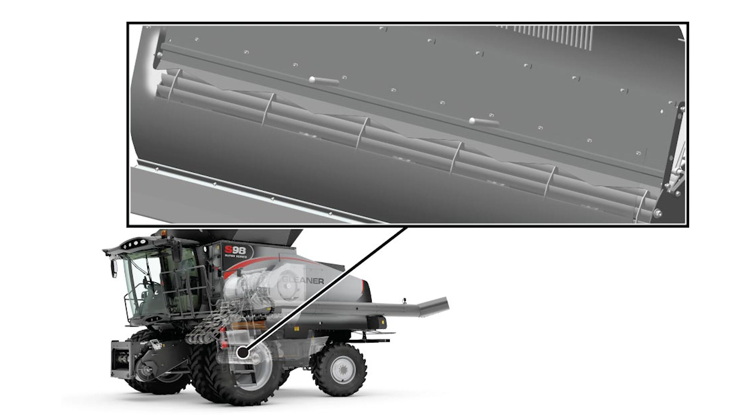First off, we'll talk about the cleaning fan cutoff area. We've made an update there to eliminate excessive noise in the operator's cab. So the front edge has been changed to eliminate a blade pass frequency that was causing a high-pitched noise in some machines, but not all.

The next item is the clean grain elevator. So we made improvements there as well. The chute and the funnel located on the return elevator head cover have been updated to prevent grain leaks. The funnel has been lengthened and the chute has been fully enclosed. Additional sealing has been placed both at the funnel and at the clean grain elevator head door. This will impact those small grains such as canola, which can always find places to run out even the smallest little cracks.

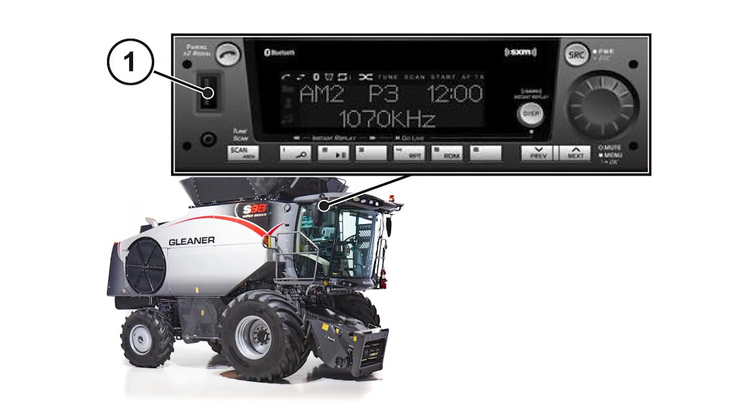Also, we've made some new improvements and added a new radio option. Both of these options have been updated to the latest display, which gives you the ability to charge iPads or whatever through the USB port and remove some of that old technology such as CD players. Both guidance receiver options have been updated also to the latest models. The Novatel receiver now is the Smart 7, and the Trimble guidance receiver is now the AG482. RTK is also available on your Gleaner combines as well right now.

So those are pretty much the model year 22 updates and improvements. There's more improvements being worked on currently with our engineering team right here in Hesston. So let's talk about kits. We have a few kits that will add the performance to your Gleaner combine.

The slow speed elevator kit. This is to slow down the clean grain elevator when you're harvesting lower yielding crops. Speed obviously causes more wear on the chains and sprockets, along with less grain damage by being able to slow this down. Over the years, we've increased the performance of our elevators for these high yielding crops, and we've sped things up, but it's not needed for all crops.

The next kit I would like to talk about is our chaffer extensions. These are additional hillside performance kits that you can put on to help keep that grain in its lane while you're harvesting on those slopes.

The Cascade Pan Blank kit is for those small grain applications. We added a perforated cascade pan for high yielding crops, which increased our shoe capacity. But for small grain, you may not need that, and this blank will actually help you clean up your bin sample in some conditions.

The perforated elevator boots have been around a long time. This helps remove dirt out of the grain while harvesting close to the ground - lentils, peas, beans, those types of crops.

And then we have a light seed kit. This is so when you're harvesting grass seeds where low volume air is needed to keep that seed in the combine and not be blowing it out.

And then the last kit, don't forget that we have a hitch extension if you would like to pull your header trailers around behind your combine. Those are some of the kits available for your Gleaner combine. If you have questions on these kits, our product specialist can be a great resource for your needs.

So let's talk about some of the activities we've been doing lately. We consistently hear from our customers about the low fuel usage, great grain quality, and low cost of ownership of their Gleaner combines. So our team decided we needed to start collecting some additional information from our customers to really understand the impact of all these items in a complete season.

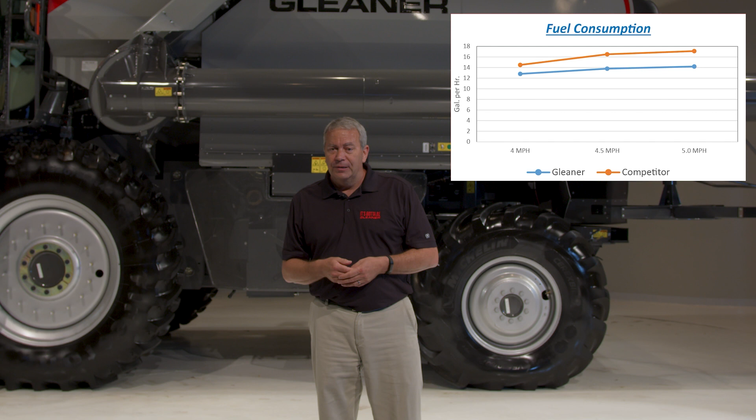This is just one area where the Gleaner outperforms the competition. As we talk to growers, we always discuss things like commodity prices, which are fun to talk about right now, but weren't a year ago. The weather, it's wet, it's dry, high input cost - all things that are impossible for you, the customer, to control, but affect your operation in a big way.

Sometimes we overlook what we can control - things like matching the correct size combine to our operation to make it the most productive. Bigger isn't always the answer to completing harvest faster or the most profitable way. Getting into the field quicker when dealing with wet conditions to get the crop out sooner, spending less money per acre to complete your harvest. These are things that you can control.

So over the years, we at Gleaner have always talked about some key items that set our machine apart from the competition. You've heard us talk about simplicity, lightweight, grain quality, fuel efficiency.

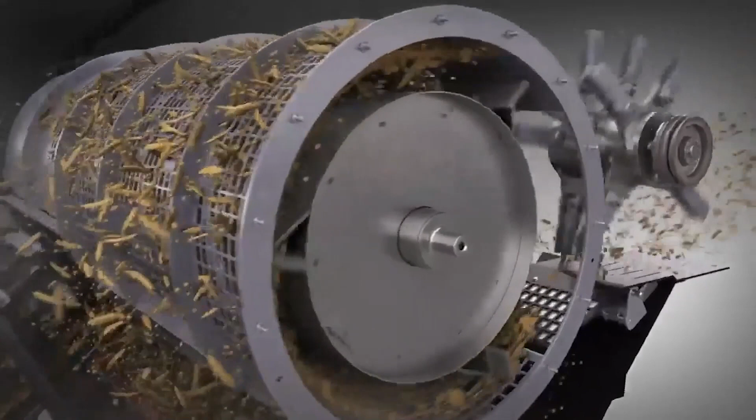So grain quality. The natural flow design keeps the crop flowing evenly without changing the direction, controlling the flow of material from the time it enters the feeder house until it discharges out the back of the combine. 360 degrees of separation. The natural flow system is gentle on the crop, and the two-stage cleaning system will deliver a quality bin sample.

But what does that mean? No dockage at the elevator. And for some growers, it means being paid a premium for their crop without sacrificing capacity, all adding up, again, to increase margins for you, the grower.

And of course, fuel efficiency. All the items that we have discussed thus far have a huge impact on the fuel efficiency of a Gleaner combine. Tied with AGCO-powered engines, the machine consistently will harvest crops using less than a gallon per acre all day, every day. And that equals less cost of operation.

So as discussed, some things are out of our control, and some things we can control. There are just a few that we can control, and the Gleaner delivers a low cost of operation, low cost of ownership by design. No, this combine is not a 6,000 bushel an hour machine, but we do know on the average farm it will harvest 3,500 to 4,000 bushel an hour for the entire season, not just for an hour, and do it with less cost than our competitors.

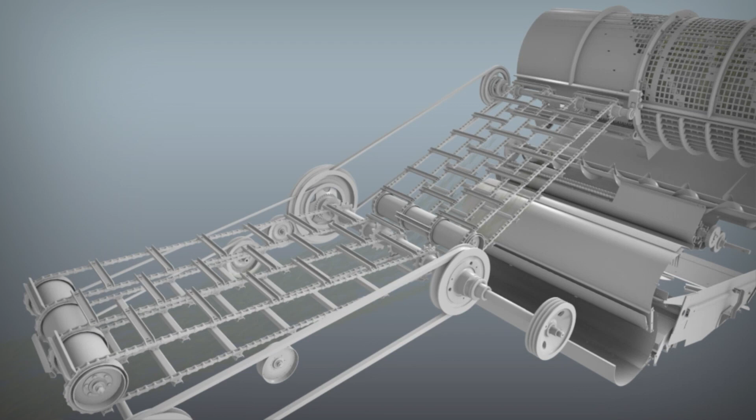Now the Gleaner combine uses two feeders, a front and rear feeder. The rear feed chain runs 10% faster than the front. This is to help avoid any issues between the transition between the two feed chains. The feeder house was updated for S9 machines. First off, the area below the feeder chain that's introducing the crop into the processor was increased. This helps in heavy crop conditions and canola. In addition, the feeder house was lengthened, and that's to help with the visibility of the header.

Let's talk about some of the things I hear at the farm shows all the time, and that's the width of this feeder house. At 39 inches, people are saying, how in the world can you get so much crop through there?

Well, it's the design of the Gleaner that makes this possible. We start at 39 inches at the front, which also happens to be the width of our concave where it enters the processor. Once the crop enters the front of the combine, we're controlling that mat of material across the concaves through the natural flow process and out the back, always keeping the flow of material at an even pace and the same width the whole distance.

Where the competition has wider feeder houses, at some point there's a transition point where we have to get it into the processor, and that gives you an opportunity for feeding issues, changing direction of the crop, maybe crop damage, and a lot of different things. This is what really sets the natural flow system of the Gleaner Combine apart - how we handle the crop from start to finish.

The header drive is available in two different configurations: the standard fixed speed header drive or the optional variable speed header drive. A hose located at the single point connection is switched when you're installing a corn head.

Both header drive options include a 2-speed feeder drive that must be switched when switching between crops. You'll want to have it in high speed for small grains and low speed for corn.

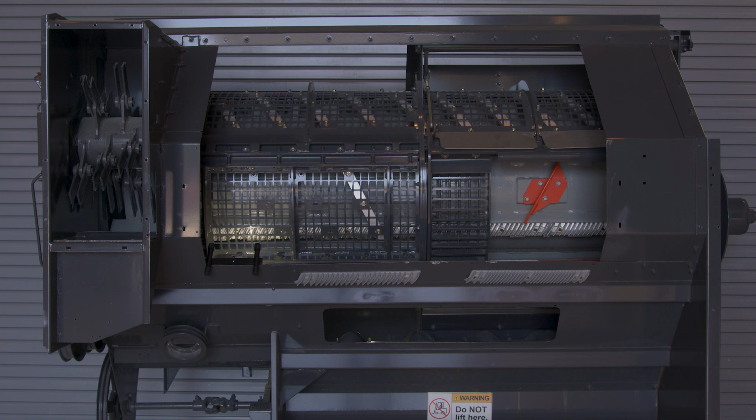Okay, thanks Aaron. We've talked about the feeder house, now let's talk about the processor a little bit. I mentioned the 39-inch feeder house on the Gleaner, and now here's our concave area that is also 39 inches. So as that crop comes into the processor, it goes across the concaves.

Then we start that 360 separation as that crop material moves through the processor. We have helical bars in here to help the flow of material, keeping everything moving across the processor, and then out the discharge over here.

A lot of people talk about the width of this discharge too - how do you get a 40-foot head and all that material coming out this discharge? Well, it's the way we feed the material out of the processor that makes the difference. Think about just taking a slice at a time off of that rotor as it's spinning the crop out, versus the competition where you've got everything coming out the back of the rotor. That's how we're able to get that much material through this discharge portion.

Aaron, maybe step over here and walk us through a few more details of the processor. So the 30-inch rotor was introduced in 2011 with the S7 series of combines, and we still use that same rotor in the S9s today. That rotor consists of 6 rows of threshing elements equally spaced around the rotor.

Each one of those consists of long and short threshing elements. The 3-bolt variety are in the threshing section, and the 4-bolt variety are in the separator section. The standard configuration is 3/4 inch spacing on all of the threshing element ribs, equally spaced all the way around, and amongst those we have some with a reverse pattern to increase the amount of scrub as material moves through the processor, increasing threshing action.

So Aaron, I see we've got a narrow bar here - what's this bar actually used for? So this bar is our 1/2 inch spacing. This is for guys that have tough threshing conditions - if you've got a lot of white caps or just conditions that need a little extra threshing. The other person that's going to use that is the guy that has a stripper head installed - they're going to want to use these in addition to possibly some close-ups that install on the bottom side of the concave.

Now speaking of our concave, we can talk a little about it. Our concaves consist of 4 sections, kind of removable sections in a pivoting frame here. The really positive thing about this is that we have one concave for all different crop varieties - you don't have to worry about switching concaves when switching between crops or different conditions.

So what you're telling me is, like a lot of our competitors who are having to switch concaves, here we just go crop to crop. Absolutely, you can use the same concave for all different crop types - just imagine the amount of time you'll save not having to switch these concaves out. We talked earlier about the efficiency of the Gleaner Combine and how we can get so much done, and this is just another time saving to make us more efficient. Absolutely.

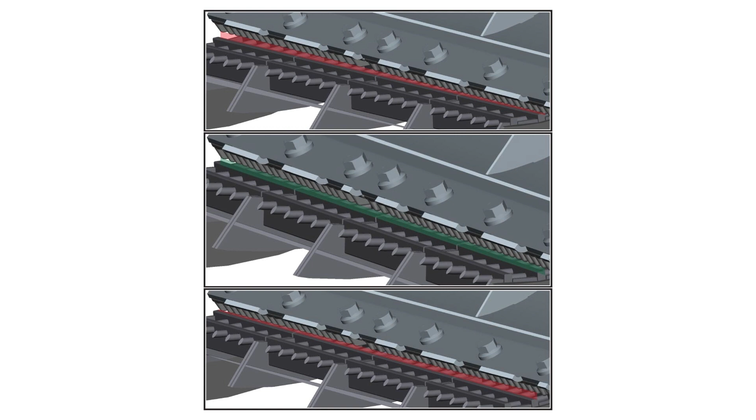When I'm talking about leveling, I'm making sure that on the left-hand side and the right-hand side we have the same amount of threshing across the whole of the concave section. Because if you're too tight on one side and too loose on the other, you could be over-threshing on one side and not threshing on the other.

So the way you do that is you want to make sure you have an eighth of an inch with this concave all the way closed. You want a minimum clearance of an eighth of an inch at the second concave crossbar here. We got them painted here just for clarity as well. That's another important thing we need to make sure of.

All right, so a lot of stuff going on in the processor right now. So what else can you tell me about this? What else is going to happen here? Another thing that's important, another addition we've made to our rotor, is the addition of these flights here.

One of the things we talked about earlier with our threshing elements is that they're doing two things: threshing the crop and also conveying that material through the processor. When we increased the size of the threshing element, we saw there was a chance that when we're feeding that crop mat in, it's going to lay over on top of itself.

These flights that we've installed on the rotor help answer that issue. There are two reasons: when crop feeds on top of itself, it increases the thickness of that crop mat, which means more horsepower is needed to drive it through. The other issue is that it traps seeds in that crop mat, which could cause increased rotor loss. So what these flights do is move that crop mat over just slightly to help keep it from laying over on top of itself.

Which is so important in the overall feeding of any combine, is to keep that material moving evenly so that you can thresh it and clean it. The whole system just works so much better.

The other item here, as you talked about the sweeps, but the cylinder bars are an important part of that conveyance as well. So it's always important to keep your cylinder bars in really good shape, because that can hinder performance, not only threshing, but also keeping the material moving through the combine.

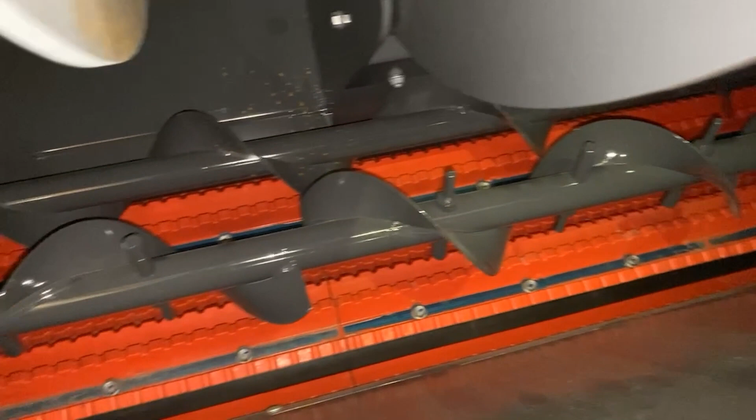So I see augers and... We've got two distribution augers with opposed flighting that bring the material from the separator section over and from the threshing section as well.

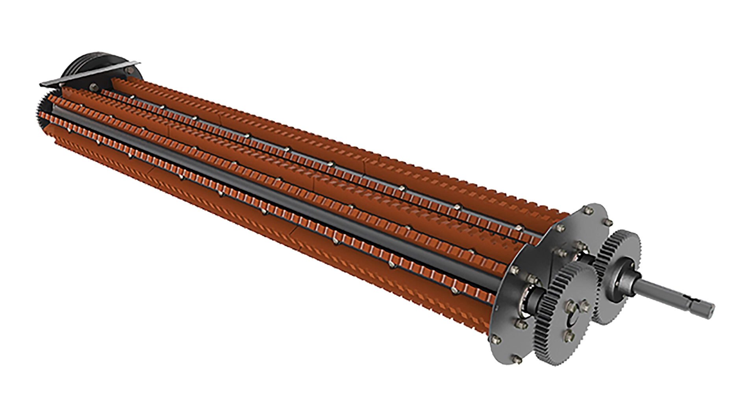So with all this going on, we talk about our two-stage cleaning in the Gleaner Combine that I mentioned earlier. This is how we achieve that, by pushing that crop down, getting that blast of air as it comes off the accelerator rolls, and also gives us some really good hillside performance as well.

Absolutely. The guys that really work the machine, like in Idaho where they're harvesting on the sides of hills, we don't rely on gravity to propel that grain through to the shoe. That's why guys on the sides of hills in Idaho, or anywhere with any kind of incline, don't have the need or want for any kind of expensive or complicated leveling system, because we use our accelerator rolls to evenly load that shoe.

So when you look at the overall design of this processor, the cleaning system, the transverse design, which is one of a kind, it's set up to not only be a great processor but also a cleaning system all in one, just like if you were cleaning your seeds through a regular cleaning process. That's what this machine is doing while it's working through the field.

So anything else you can tell us about it, Aaron? No, I think we're good. Let's move on to the cleaning system, to the cleaning fan, and talk a little bit more about it.

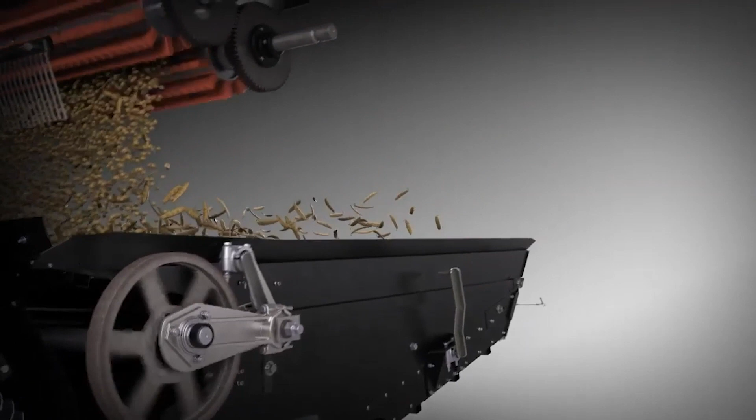Now the cleaning fan here is a 14-inch scroll-type cleaning fan that develops two streams of air. The first stream is where a majority of that cleaning action happens. The accelerator rolls throw that material through that first stream of air, and the more dense crop is able to pass through that first stream, while the less dense MOG is blown out the back of the machine.

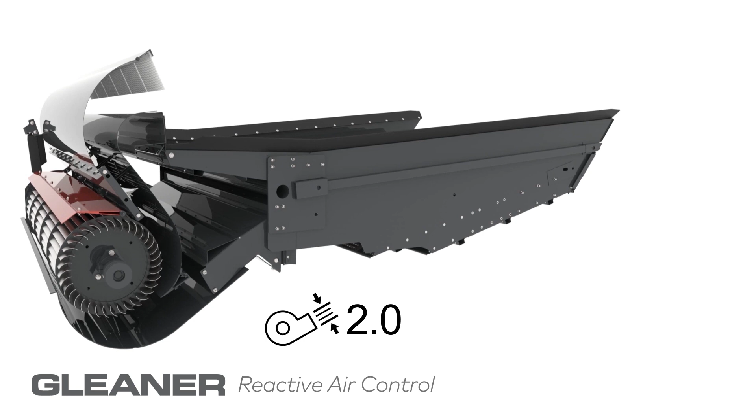So what changes have we made to this system recently? We introduced the reactive air control system, where we control the amount of air coming out of the fan by adjusting the choke based on the position of the feeder house. As the feeder house comes up above the cutoff line, we actually decrease the volume, decreasing the amount of airflow to save the seed coming across the shoe and decrease shoe loss.

This happens at each end of the headlands, saving that seed to keep it in the bin and not on the ground. So just another feature we offer on the Gleaner Combine that helps the bottom line by keeping all the grain in the tank.

So when you look at the whole system here, we've been through the processor, talked about the distribution augers, the accelerator rolls, the two-stage cleaning that I alluded to earlier to get those clean bin samples. These are the types of things that really set this machine apart, and that is the heart of the Gleaner Combine. The transverse rotor, distribution augers, accelerator rolls, two-stage cleaning is all part of that extra you get with the Gleaner Combine.

We've got a few other things to talk about. We've got the cleaning shoe too. So let's take a look at the back side of the machine and talk a little bit about it as well.

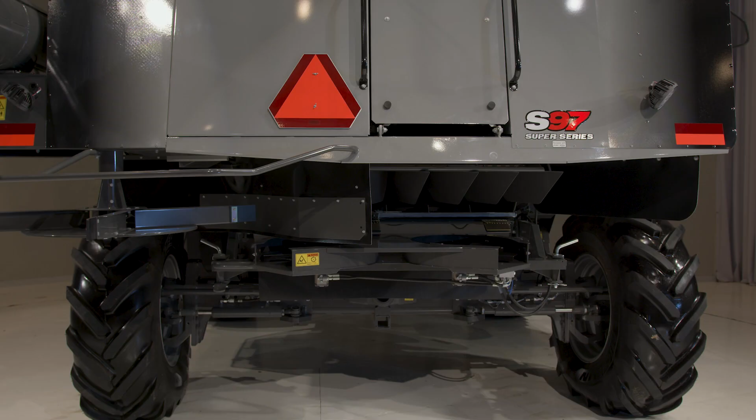So Aaron, I hear so much out there in the field about residue management and how important that is. We've talked about a lot of other important things this machine does. Tell me about the residue management system on the Gleaner.

Well, there's a couple things we can talk about. First off, at the end of the rotor, we alluded to it a little bit earlier about our chopper, but we actually have two different options. We have an impeller, which is standard on machines, and the optional 24-blade chopper, which is a two-speed chopper that you're able to adjust between different crops. You want it in high speed for small grain and low speed for corn.

So once that material comes off of that rotor, off of the chopper or the impeller, it comes down here to our straw spreader. Our straw spreader on the S9 machines utilizes a closed loop functionality to where we're maintaining that spreader speed throughout the day, whether the oil's hot or cold.

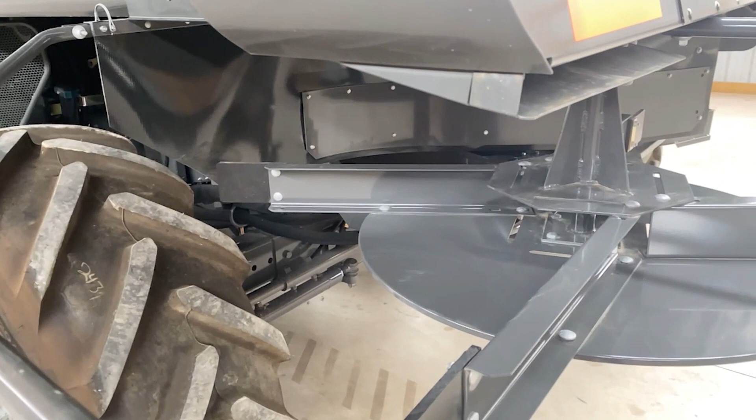Also, Aaron, I see there's some adjustments on these spreader blades. Exactly. What we adjust there is to be able to adjust our spreader width. So if we've got different sizes of headers, or if you need to direct it in one direction or the other, you can adjust the position of those slingers to adjust that spreader width.

So when you look at the residue management coming out of the Gleaner, you have everything off your discharge, which is being spread with the spreader over here, and then all of your chaff and other material coming off of our shoe comes right into our standard chaff spreader. All machines are equipped with a hydraulically driven chaff spreader.

The nice thing about it is it's easily swung out to be able to access our cleaning shoe and be able to service it or change out chaffers or sieves. So let's do that real quick.

Yeah, that's extremely easy, Aaron, and it gives you good access to get into the cleaning shoe itself. Absolutely. So on our chaffer and sieve, when that material comes through that first stream of air, it's deposited onto the cascade pan, which is a perforated cascade pan to increase the amount of cleaning surface area we have on the shoe.

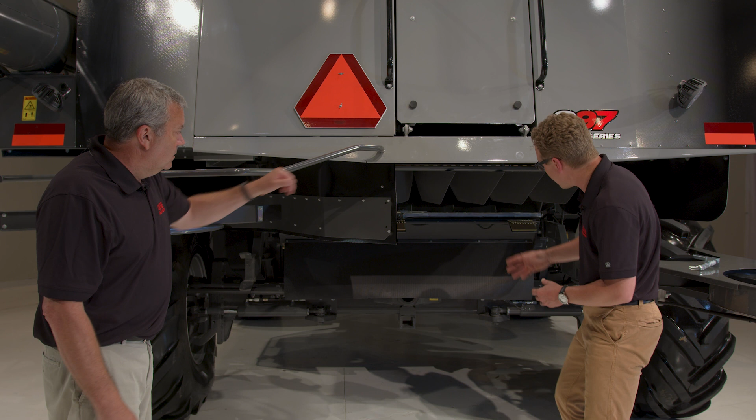Now, I think you alluded to it earlier. We have a kit available to be able to block that off in certain small grain conditions. Yes, absolutely. And in some conditions, that's maybe a kit that you would need. Right? Absolutely. As far as the chaffer and sieve, we have different options depending on crop condition or just the cleanliness, how they want to adjust that cleaning shoe to get the maximum cleanliness out of their bin sample.

So just noticing these fins in there, Aaron. That's our spreader board, distributing the material that, remember, we were talking about earlier, that's coming through that first stream of air, across the width of the back of the machine to maximize discharge spread and get that nice even mat for those guys looking for no-till or just decomposition of that material.

So there's a lot of air coming out of there. A ton of air coming out. Majority of our cleaning's happening through that first stream of air. Right, and that's all part of the cleaning system on the Gleaner Combine.

Absolutely. So let's talk a little bit more about our unloading auger system and our grain tank. So Aaron, we've talked about feeding, the processor, the cleaning system, residue management on this Gleaner Combine, but what about the grain handling system?

Well, we've got one of the best in the industry. It's one of the fastest and most efficient, as well as one of the best as far as keeping that clean grain bin sample. With a 4 bushel per second unloading auger rate, we're able to go from full to empty in about 90 seconds. To do that, we incorporate this swivel design here that, unlike our competitive machines, doesn't use a lot of power to go through that turret unloading auger that they have. We're able to easily transition that material out to the grain cart.

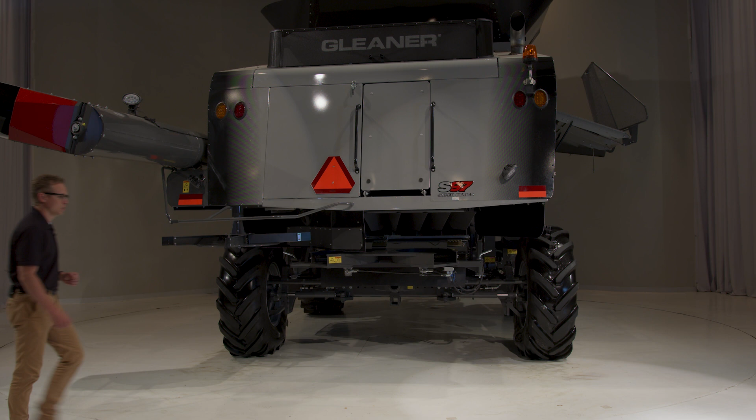Daily inspections start in the engine compartment. Make a general inspection for any material buildup or leaks around the engine. You also want to inspect around the heat shields to make sure there isn't any material buildup around the heat shields of the engine.

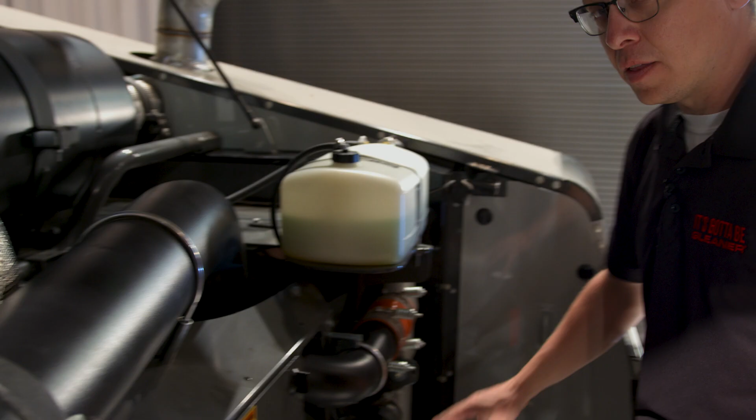The hydraulic reservoir for the hydraulic system is located in the engine compartment. It's important to check the level with the feeder house down and the unloading auger swung in. If you check it with the feeder house up, or the unloading auger swung out, you're going to see that it reads low, and if you overfill it and then drop the feeder house or swing the unloading auger in, you're going to have quite the mess in the engine compartment.

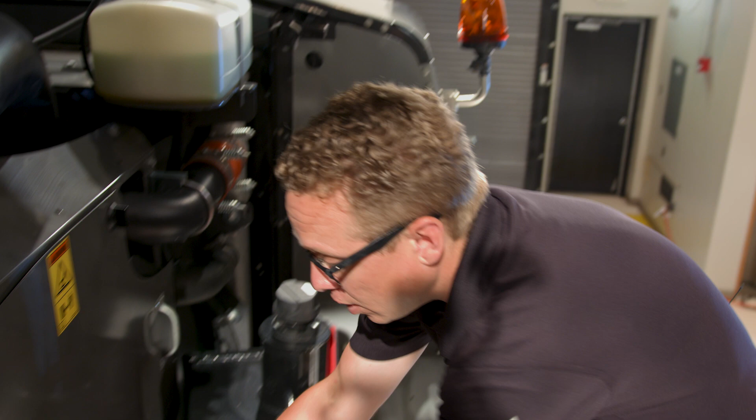Also located inside the engine compartment is the hydraulic charge filter. This needs to be changed every 250 hours.

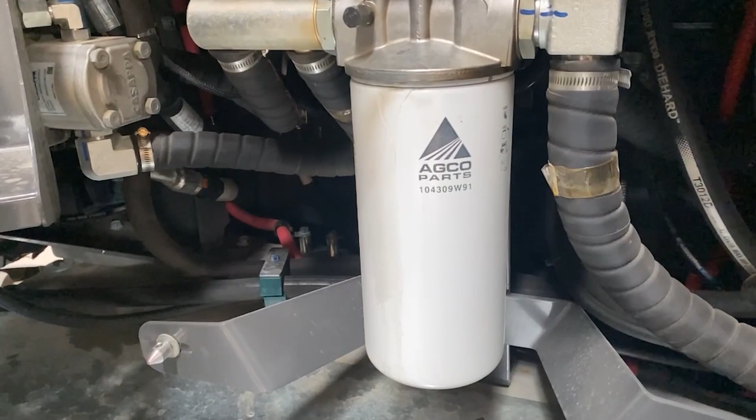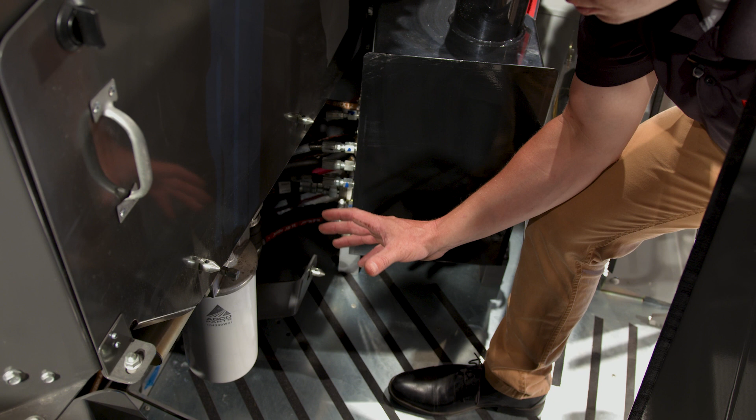Any time you change the hydraulic charge filter, you need to make sure you bleed the air from the system. There's a little bleeder valve right here. So when you change this, you'll want to fill the reservoir until you get just hydraulic oil out of this bleeder screw. If you have a pocket of air trapped inside and start the combine, there's a really good chance you're going to cavitate the spreader pump and destroy it. So make sure anytime you change this charge filter, you're bleeding the air from the system. You'll also want to change the charge filter, the hydraulic oil, and our return filter every 500 hours.

While you're in the engine compartment, it's a good idea to open up the processor door and inspect our rotor and separator cage for any kind of material buildup or condition of our rotor components.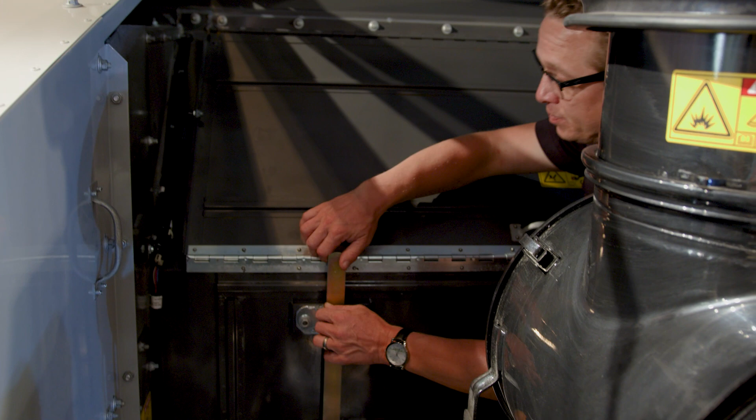You want to inspect for any kind of material buildup between the separator cage and the separator door. You'll notice there's a panel installed that helps prevent that from occurring. Sometimes rotor speed can cause that accumulation to build up as well, so before you remove this panel, try adjusting your rotor speed, dropping it a little bit, to see if that corrects the accumulation.

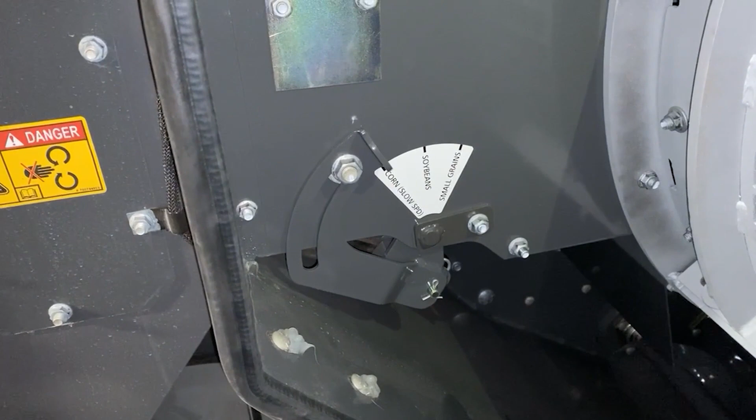You can also see inside here we can access our chopper knives. So if you need to move these stationary chopper knives, depending on the crop you've got, you can do that from inside here.

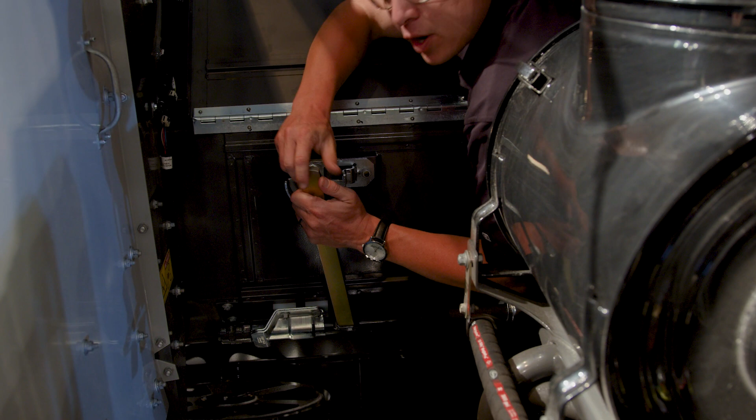Make sure that when you're closing this processor door, these latches are securely latched. If they're not securely latched and this door is not fully closed, you can fill the engine compartment with material really quick. So make sure you put a hand on these and confirm they're fully latched.

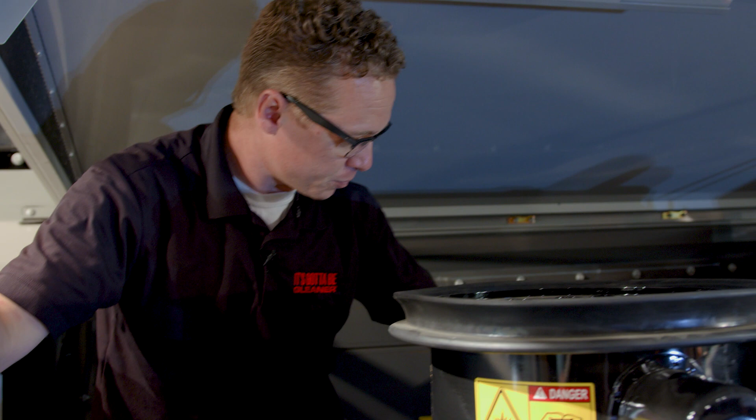Now the front of our engine is easily accessible from the front and rear side, unlike our competition, which requires you to take panels off and go through the grain tank to access the engine. Our engine oil dipstick is located on the front side of the engine, as well as our fuel filters. There's also an additional fuel filter located underneath this step here as well.

You'll also want to check for any accumulation of dirt or debris on top of our pre-cleaner. You'll want to open our air cleaner up and check the primary and secondary filter, cleaning the primary filter or replacing the secondary filter as needed.

One point to make on hydraulic oil filters is that we only have two hydraulic oil filters on the whole hydraulic system.

On competitive machines, depending on the configuration, you can have as many as 4 oil filters to change periodically. We're going to continue our inspection on the left-hand side of the machine at the operator cab platform ladder.

The unloading auger swivel contains a majority of the grease fittings on the left-hand side of the machine. It's important to swivel that unloading auger incrementally as you're greasing those fittings to make sure you've got good coverage of grease throughout the swing. It's also important to remember to grease the fitting at the end of the unloading auger for the bearing, the unloading auger U-joints, and the cross auger bearing support as well. Cleanouts are included on the swivel here on the outside and on the inside to remove any debris from the bottom of the grain tank. Before you go harvest, it's very important to make sure both of those are installed.

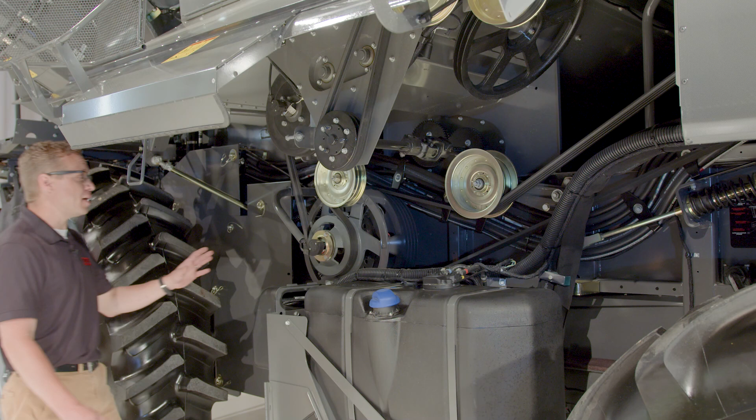To speak a little more about the drives of the Gleaner Combine, the drives are designed to efficiently and smoothly transfer power throughout the machine. You'll notice there are very few places that we transfer power through gears or hydrostatic drives. Either of these methods introduce drag or hydrostatic inefficiency, and that inefficiency translates to fuel at the fuel pump. By not having those gears or hydrostatic drives on the Gleaner machine, that saves you money during operation.

The other thing to point out is that most of the shafts and drives are positioned transverse to the travel of the machine. This helps out in a couple of ways. First off, all of the shafts being transverse and spinning in the same direction means that the processor runs smoother when it's engaged. It also places most of the bearings to the outside of the machine for easy replacement or repair. You'll also notice that most of the shafts have belts pulling in opposite directions. This is to help extend the life of the bearing by making sure there's not more load on one side than the other.

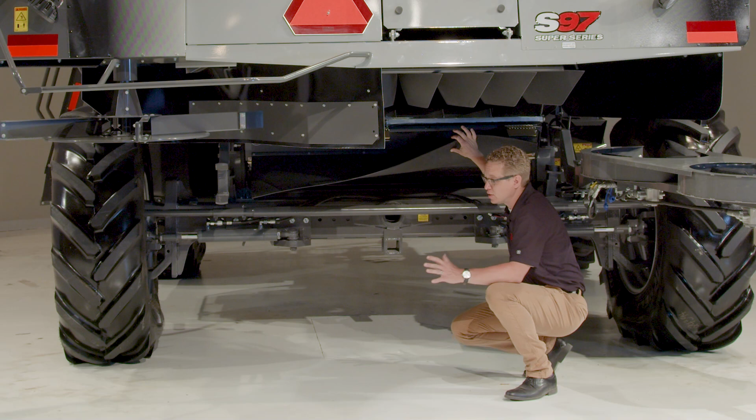There are many grease fittings located on the rear axle. The location and number will depend on which axle is installed on the machine, the standard heavy-duty rear axle or the optional rear wheel assist axle. Either axle will have to have the fittings lubricated every week. In addition, each axle has connecting rod ball joints and steering cylinder ball joints that need to be lubricated every other week. While you're lubricating these fittings, it's a good idea to remove any debris that might affect the hoses for the hydraulic cylinders or any of the electrical harnesses that run along the rear axle as well.

Let's continue our walk around on the right-hand side of the machine.

The rotary screen and cooling package are easily accessed and cleaned from the ground. The cooling package includes the radiator, the combo cooler, and the fuel cooler.

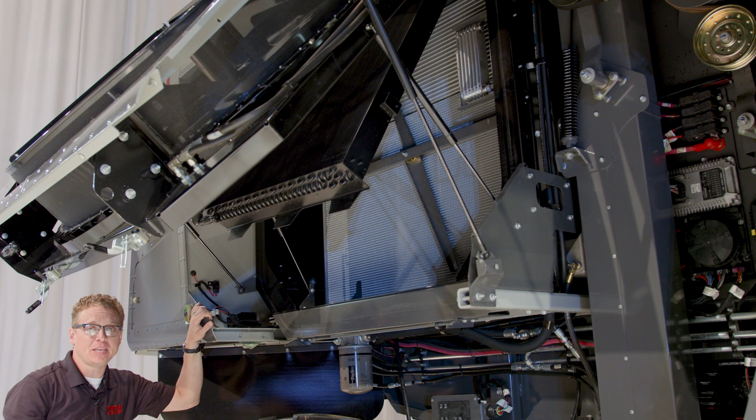While the SmartCool fan does a great job of keeping the cooling package clean, it's a good idea to come in here every day and inspect the area for any material or anything trapped inside the rotary screen basket. If you're seeing excessive material build up in here, check the speed on the rotary screen. If it's too slow, the air seal, the little fins located on the outside of the basket, can't develop the air seal needed to keep that material out. The specified speed is 180 RPM.

Another location or service point that's often missed is the idler arm for our rotary screen drive belt. We need to come in here and lubricate and check that every couple of weeks.

The clean grain and return elevators are tensioned from the ground. Make sure that you can move the link laterally, but you can't pull the link away from the bottom of the sprocket.

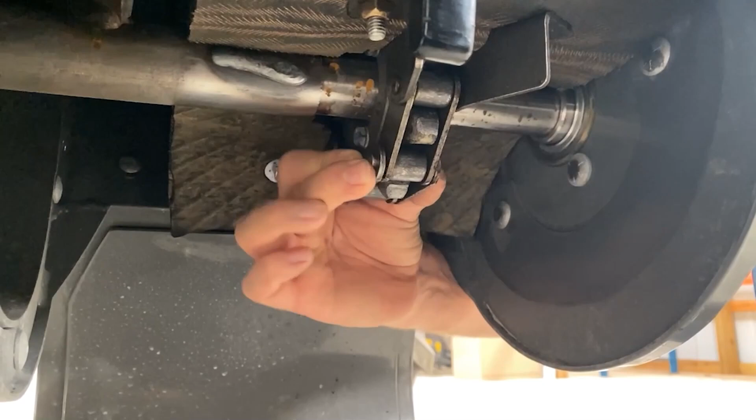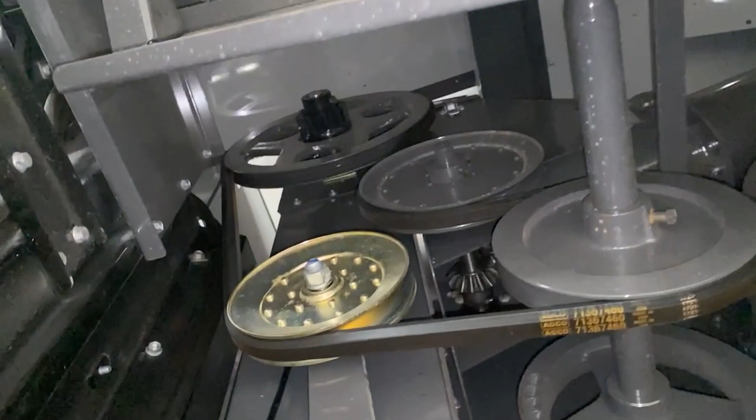Each elevator also includes a torque limiter. This is one of those few places that you might have to get off the ground to be able to service those torque limiters, but again, you can use the step located here on the right-hand side.

One area that operators try to cut costs is by using aftermarket parts, and the elevator chains are a good example of why you don't want to do that. AGCO Genuine parts include updates to improve performance and durability that a lot of aftermarket parts don't include.

A dealer I once visited recently had a great example of this. An operator tried to save some money by purchasing aftermarket elevator chains. Those chains didn't include the updates to the hardware that secure the paddles to the chain. Predictably, those paddles came off, and now the operator was out the cost of that aftermarket part and the AGCO Genuine part that they should have purchased in the first place.

Secondly, aftermarket parts are typically cheaper because they shortcut on materials. The materials we use in AGCO Genuine parts are specified by engineering for the best results in performance. Saving money on these aftermarket parts sounds like a great idea at the time, but does that idea sound as good when the machine is down, when time is valuable, and you've lost that time due to a lesser quality part?

So moving on, our rotor drive is located on the right-hand side, and it uses two variable sheaves to be able to adjust the speed. The driven shaft is lubricated, and there's a daily lubrication on that.

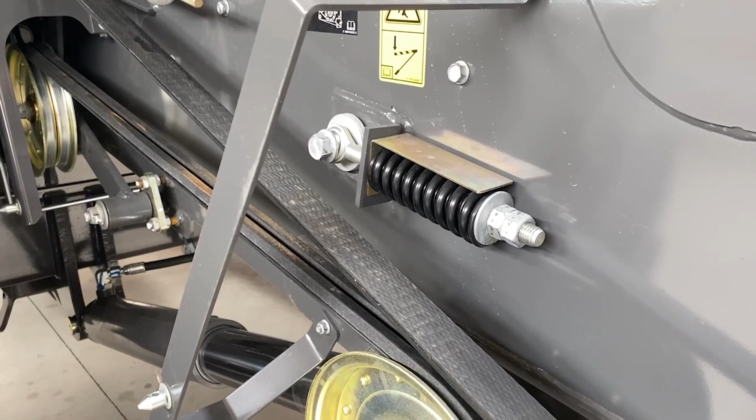Tension springs are located on the left hand and right hand side of the feeder. Tension that feeder chain, making sure the springs are compressed to the equal length of this spring gauge. There's also tension springs for the rear feeder. You want to inspect the condition of the rear feeder and make sure those tension springs are adjusted as well.

Make sure that you've also emptied out the rock trap daily. You'll want to do that on the right hand side using the lever. Make sure you close it before you harvest as well.

As far as lubrication fittings, there are only two daily lubrication fittings, and those are for the pivot blocks of the feeder house. They're located on the left hand and right hand side of the machine. The torque limiter for the feeder and the lateral tilt are lubricated weekly, and the couplers for the axle drive line are lubricated once a month.

While you're at the front of the machine, you'll also want to check the condition of the drain tubes for the air conditioner. Make sure there's no dirt or material buildup at the end of them, and make sure that the valves are still installed.

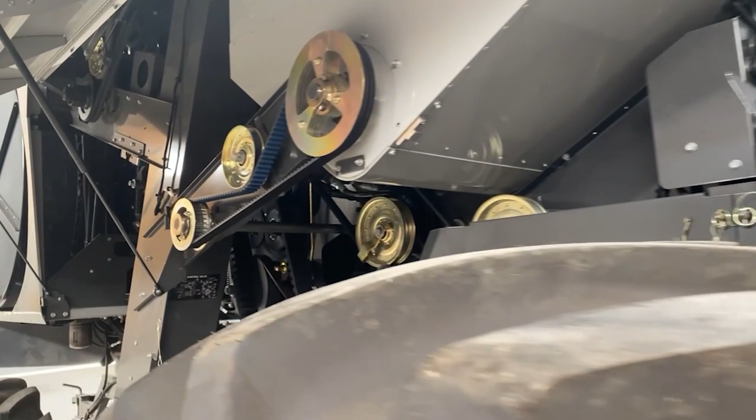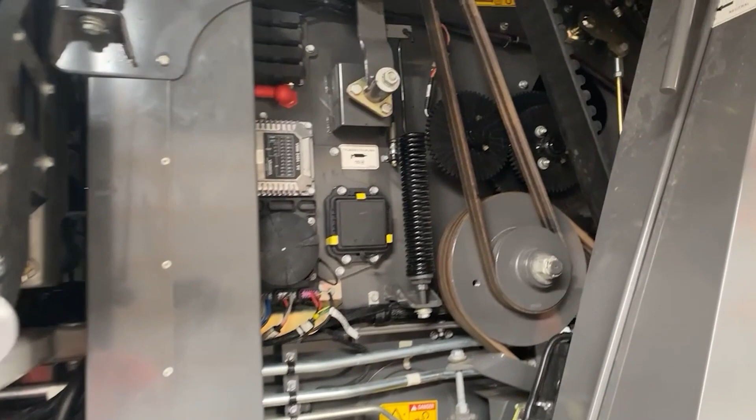One of the many benefits of owning and operating a Gleaner combine is the lower cost and ease of maintenance and repair. If you've ever opened the side shield to a Gleaner and compared it to the competition, the most striking observation is the accessibility to major components of the Gleaner. This helps maintaining the machine and gets you in the field faster should an unexpected failure occur.

Unexpected repairs are going to happen with any machine. It's how fast you can get back into the field that matters the most. Having a machine that is easier to maintain means less time invested during the day with a wrench and a grease gun, and more time in the field enjoying the harvest experience.

This has been a quick walk around of the machine. If you'd like more information, reference the operator manual or visit with your local Gleaner dealer. I'll turn it back over to you, Kevin.

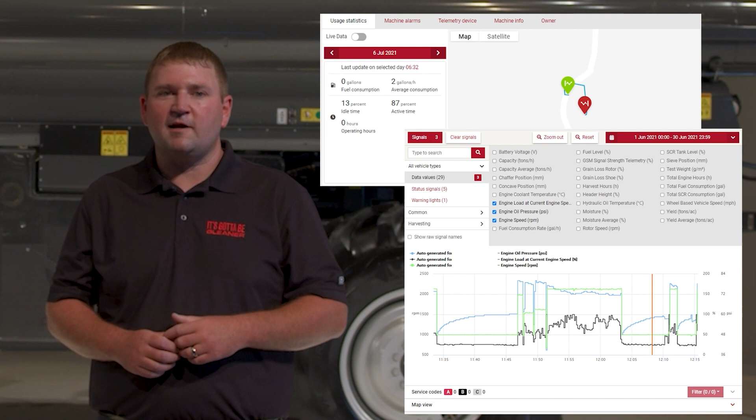Included on all new Gleaner S9s is the AGCO Connectivity Module, or ACM. The ACM is connected to the machine's CAN bus and is able to provide critical machine information via AGCO Connect. This includes location, engine hours, service reminders, fault codes, and more. There are also combine-specific parameters that can be viewed, such as machine headings, header position, yield, etc.

Connect is a powerful tool designed to further enhance support for your combine when every minute is critical. With 5 years of service included on new machines, Gleaner ensures you will have visibility of this data when it matters most. Now that we've discussed some of the exciting technologies Gleaner has to offer, let's join Jared in the cab to dive a bit deeper into the Tyton terminal.

Hi everyone, my name is Jared Cook. I'm the engineering manager. I'd like to thank you guys for the opportunity to walk you through your Gleaner Combine and some of the key features here in the cab. Starting out today, we're going to focus here on the armrest.

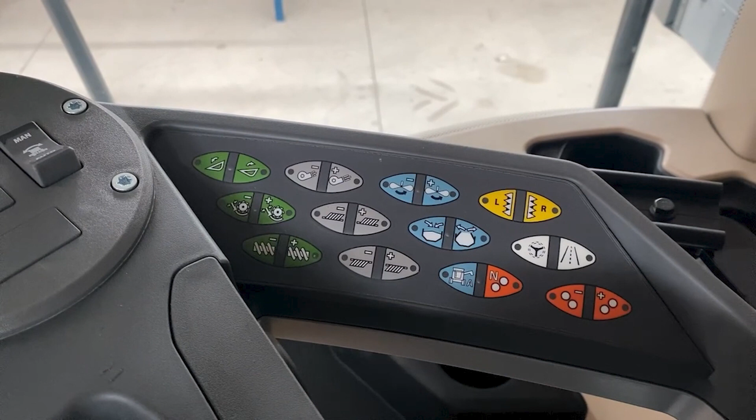Here on my right-hand side is actually a bank of switches for all your main and key functions for your Gleaner Combine. So anything that you need to do in-field operation, to transitioning from a field to a transport mode, can all be controlled from right here, from your right hand, very easily and accessible.

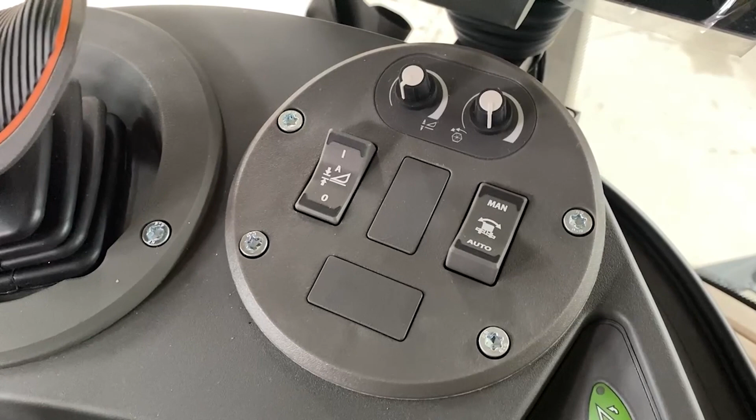Up here in the center is your controls for your auto header height and auto tilt control. There's two buttons or two toggle switches for turning your auto header height on or your auto tilt on, along with two rotary dials for controlling reel speed and height.

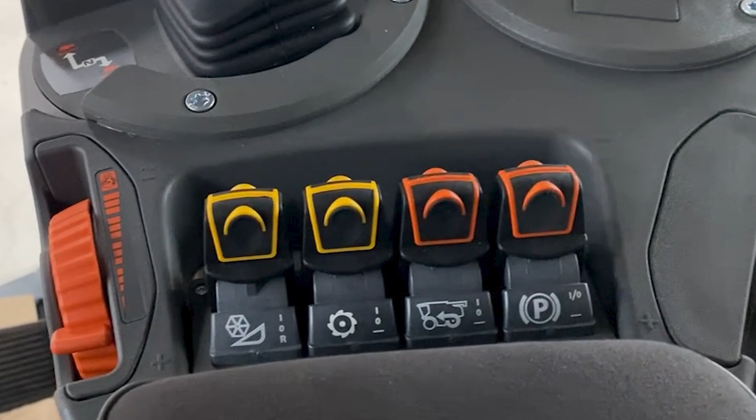Additionally, we have a bank of switches here. These 4 switches control a variety of functions, 2 of the functions being primarily your thresher engagement and header engagement. We have a park brake switch, and then we also have an RWA switch here that's an option on your Gleaner Combine. Jumping over to the Tyton terminal, I'd like to remind everyone some of the key setup things as you guys get ready for harvest this fall.

First and foremost, we're going to show you and walk you through on how to import fields. So if you're like me and you're a big planner, you might want to try to set up some fields and boundaries before you start your harvest.

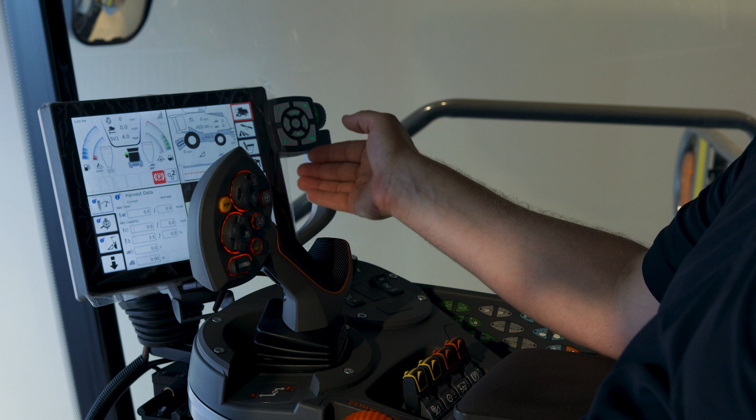Starting out, we're going to go into the admin menu. You'll find this menu by the icon here on the right, 4th button from the top. It's the one that looks kind of like your Tyton terminal with a wrench in the middle.

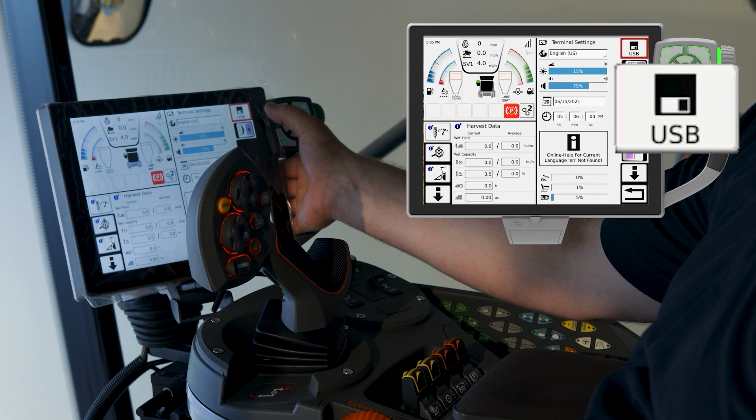We'll press that button twice, then navigate to the very top button that says USB. Here you'll find your data exchange server. This allows you to import or export data or tasks depending on the time of harvest that you're in.

Since we're preparing for harvest, we want to import our Tritera field. You simply select that field, hit the up arrow, and it will copy that onto your terminal. We'll use this field a little bit later when we're setting up our task data.

To recenter, we're going to go ahead and hit the home button. That'll bring us back to our default view of the Tyton terminal.

The next task that we like to do is start a task. To start a task, you'll see the third button on the right is a notepad. We'll select that button and we'll press it twice again.

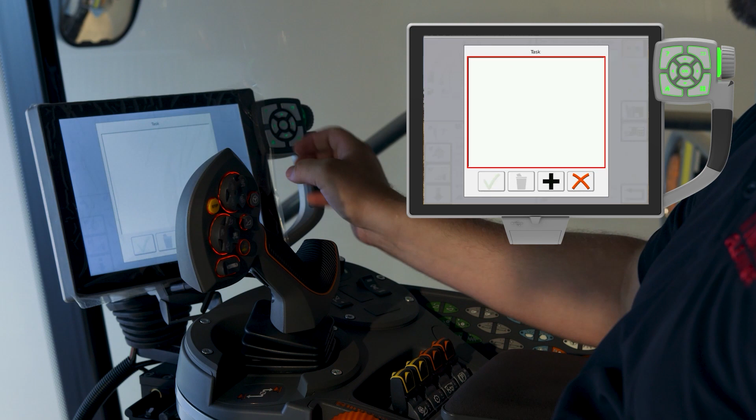To create a task, we're going to select where it says no task selected. We're going to hit the plus icon and we're going to type in Gleaner Super Series.

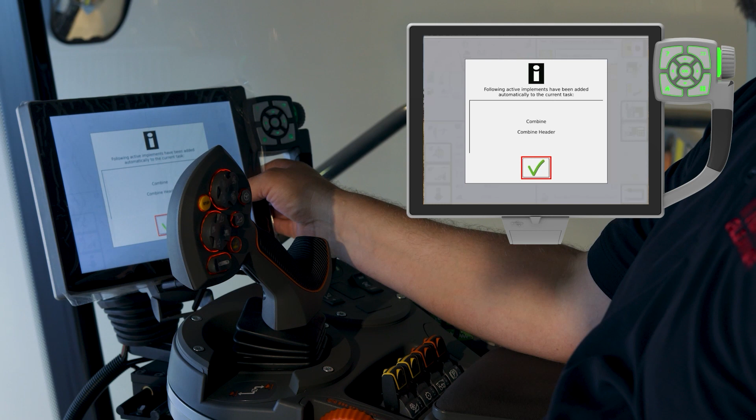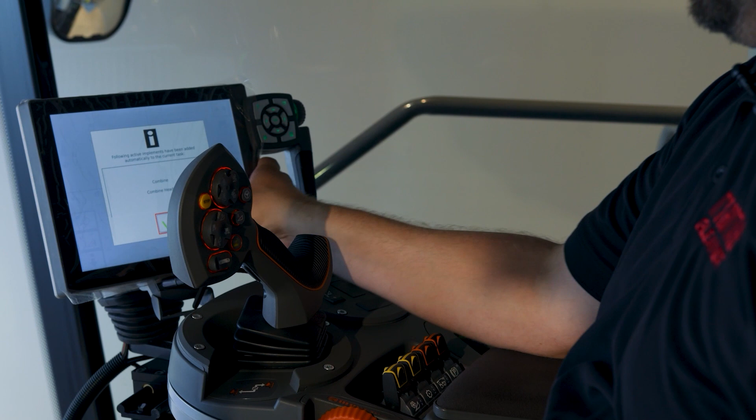We'll hit the green check mark, and as you'll see, you'll already have two different types of tasks added to your Gleaner Super Series task.

Next, we want to add your field. So we'll go here. We'll see one of the categories is field. We'll select that, and there's our field, Tritera, that we created earlier and imported earlier.

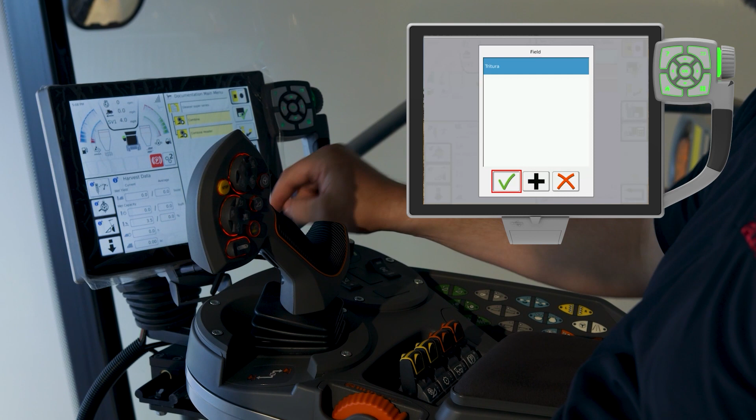It'll pop up an info box that'll ask you, do you want to use this field Tritura for your guidance system? Yes, we do. Now we have our initial task set up.

Next, let's navigate into our task settings page to ensure that we have the correct triggers for automatically starting and stopping tasks. By default, here on the bottom of this page, you're going to see default automatic task handling.

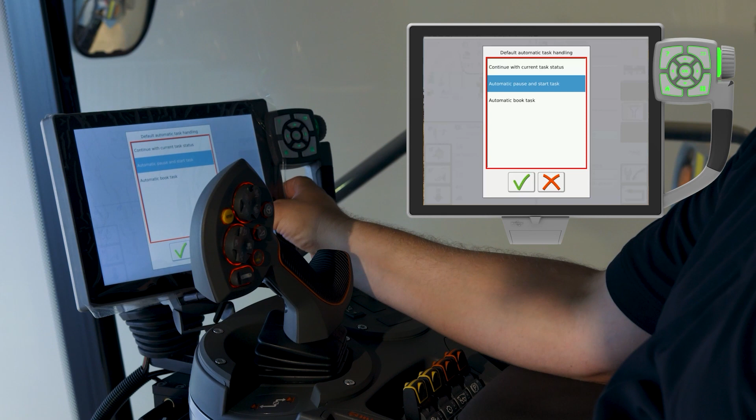These should automatically be set to activated and automatically, along with automatic pause and start task. This is important so that when you enter or leave a field, your task data will automatically start and stop so you can keep your fields clear and your data as accurate as possible.

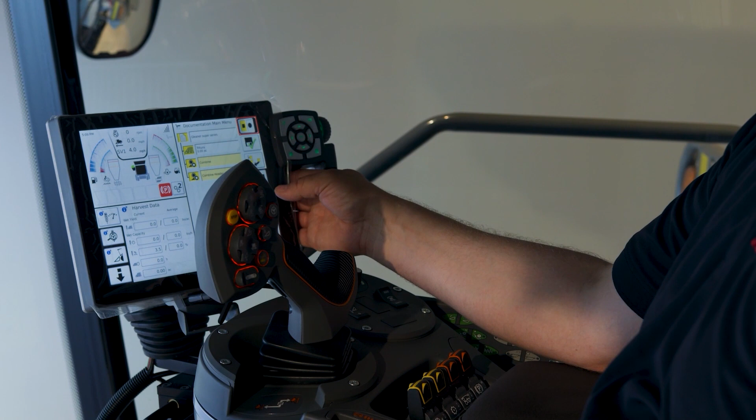One other thing to check while we're in this menu is your counters. Your Gleaner Super Series has a number of different counters on board. These counters help reflect what is shown in your harvest data page down here in the bottom left.

It's really important to make sure that when you start your harvest, if you want to see data down there, that you have the right counter or the right field selected.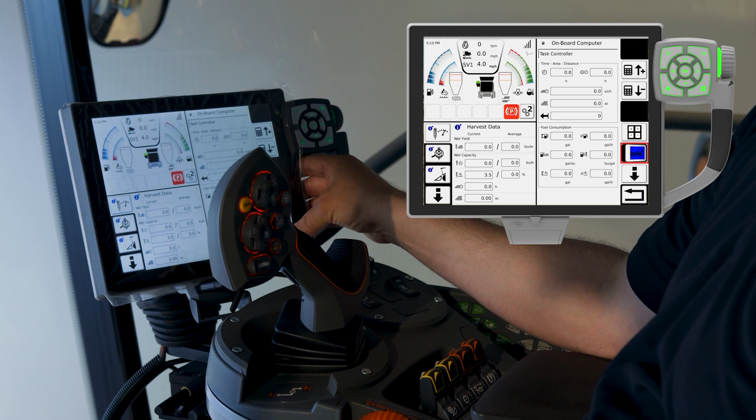Right now by default we have the task controller on, and that info plus is active. That's active indicated by this blue toggle switch here towards the bottom right. If that is off, or you have another counter on, for example, let's turn the counter 1 info plus on.

That means that this counter 1 is now shown in your bottom left. If your top counter switch is off, we're going to go ahead and turn that on, so you are now using both your counter 1 and your task data to record.

One important thing to remember is your counter data does not store your task data. Your task controller data and your counter data is separate.

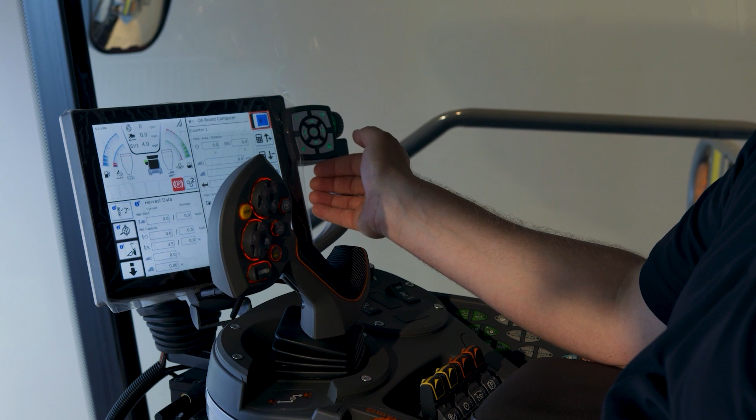So to really record your task controller data, you do this by the top switch up here on the top right. You toggle that on,

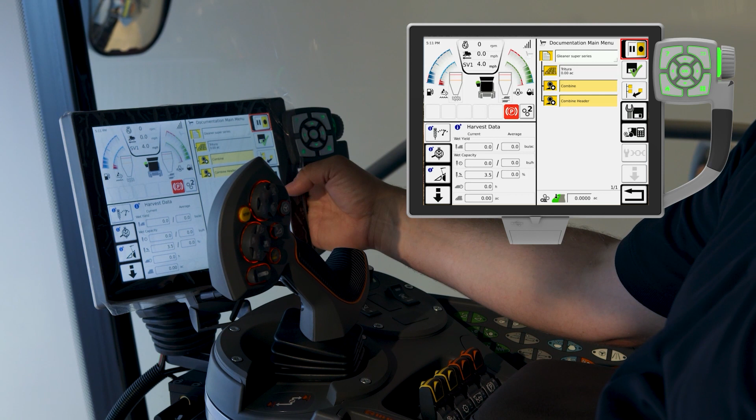and you'll see now here on this quadrant 1 that there is another notepad that turned green. If that's green, that means you're actively recording data. If you toggle it off, you'll see that it grays out and is more of a white icon. That means that your task is not active.

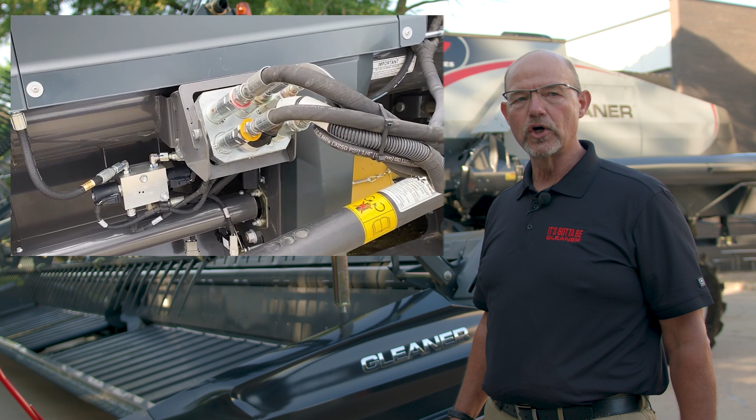Let's start with the 9300 header, which is designed to provide a smooth, even crop flow into your Gleaner combine. The 9300 Dynaflex header is available in widths from 25 feet all the way up to 40 feet, and the structure is designed with upper and lower tubes, giving us increased durability. It has a single point hookup for easy attachment and detachment of the header from the combine.

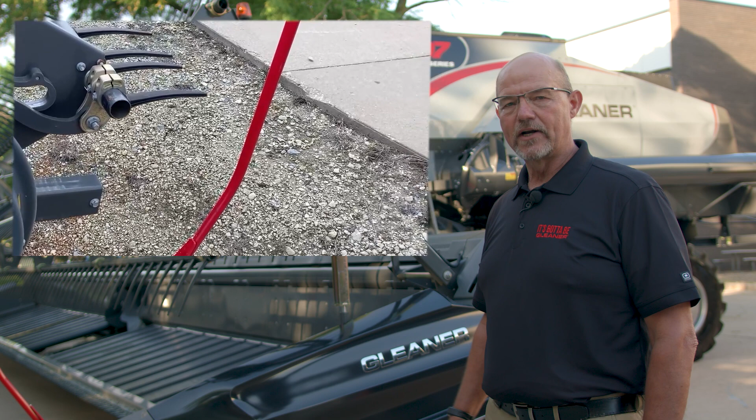The dividers on the header have a narrow profile, which reduces the footprint and helps keep the header from plowing or pushing into the field. The lightweight design of the dividers and end shields decreases the weight on the skids to also help prevent plowing. There are optional stainless steel skids available, as well as a low skid option. To assist with guiding the crop into the header and prevent knocking the standing crop down, we also have available longer divider rods, as well as several different divider rod options for different field conditions.

The header is standard with a fixed pitch for your Gleaner combine, but it is available with a hydraulic pitch as well, which allows you to adjust the cutter bar angle as needed for different field conditions.

Now let's take it over to David, and he's going to talk more about the cutter bar. The cutter bar gets its flexibility from the hydraulically dampened tilt arms. These tilt arms are located every 30 inches across the length of the header, giving us a flexibility range of 8 inches, giving you the ability to cut close to the ground even in rolling ground conditions.

The flotation is assisted by a hydraulic accumulator on each side to provide constant ground pressure while flexing. The pressure is adjustable from the cab, allowing you to set the ground pressure for varying field conditions, or to pressurize it completely for a rigid cutter bar.

Underneath the cutter bar, we see the UHMW covered skids that slide smoothly across the ground. On each end of the header, we have optional stainless steel skids that give us better wear life compared to the plastic skids. For the sickle, we have two options available.

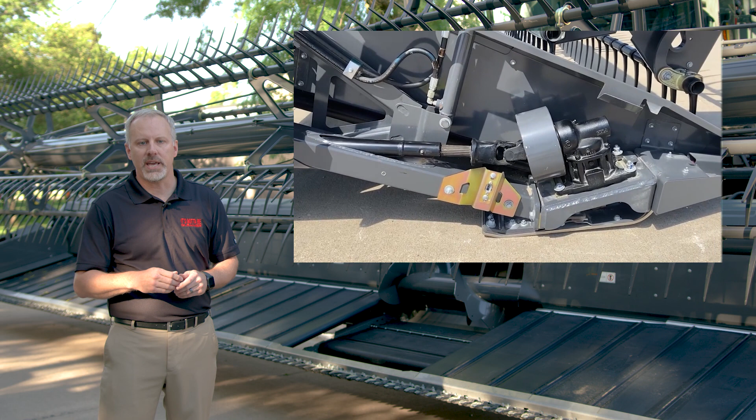On this header, we have the Schumacher cutting system, or you can choose the AGCO cutting system. All sizes of the Dynaflex headers have dual sickle drives driven from each end of the header with a dampened PTO shaft and a heavy-duty flywheel, which reduces vibration and increases longevity on the sickle and the structure. The independent tilt arms, the skids, and the sickle together will give you superior ground following and cutoff performance for all of your harvest conditions.

Mark, let's talk about some of the features on the drapers and the center feeding. Thanks, David. In order to get the crop into the combine, the drapers provide a simplistic design that requires less maintenance and promotes less downtime.

The side draper canvases are 41 inches wide and move at 502 feet per minute in order to keep the crop away from the cutter bar and flowing into the combine. Coming soon, we will have an optional variable speed draper drive to allow adjustment of the draper speed to optimize crop flow into the center draper and ultimately into the combine.

To provide consistent tracking and alignment, a V-guide is designed into the header. There's a stainless steel belt guard on the front providing long wear life and a smooth transition from the cutter bar to the drapers. The inner belt roller has a scraper installed to prevent material buildup.

The tension for the belt is obtained through a spring-loaded tension system, with an extended adjustment range as well as an indicator to show the tightness of the belt and match the tension of both the right and left side belts. There is an onboard tensioning tool when adjustment is needed. As a starting point, we should adjust the tension to the midpoint of the indicator. The center draper is 48.5 inches wide, with a canvas that moves at 573 feet per minute.

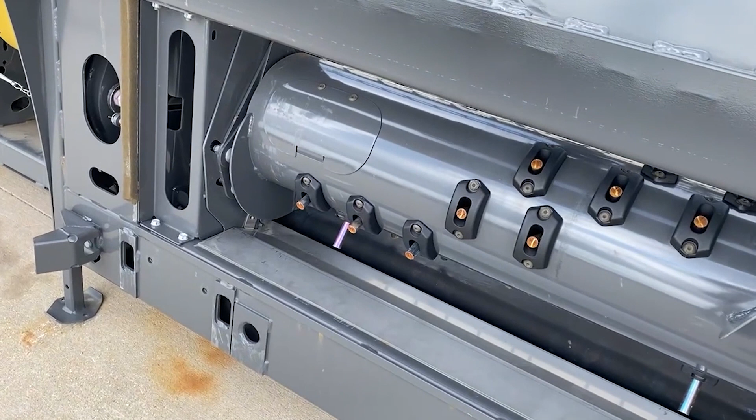Also available is an optional retractable finger feed drum with adjustable finger timing. This is recommended for high yield crops such as canola and other crops where you may have a high material volume other than grain.

There is a stainless steel auger pan which increases the life of the pan in this high crop flow area. Clutch protection is incorporated into the drive system for the center draper. Should an obstruction occur, it will protect it from any damage.

Now let's go back to David and talk more about the reel.

The reel on the Dynaflex is a robust design with a large center tube and heavy-duty tine tubes. The plastic tines are designed to hold up in tough conditions.

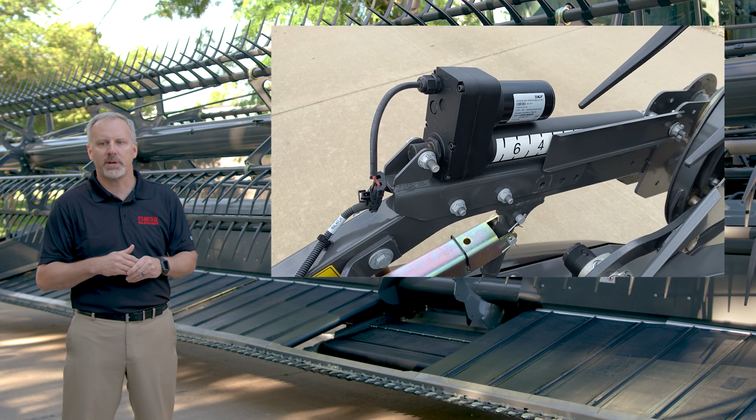The tine pitch can be adjusted from the right end of the header of the reel, which makes the reel more or less aggressive. The reel is hydraulically driven, allowing the speed to be adjusted from the cab to optimize crop flow. The fore-aft position of the reel is controlled with electric actuators, which can be adjusted from the cab, again to optimize crop flow or move forward to pick up down crop.

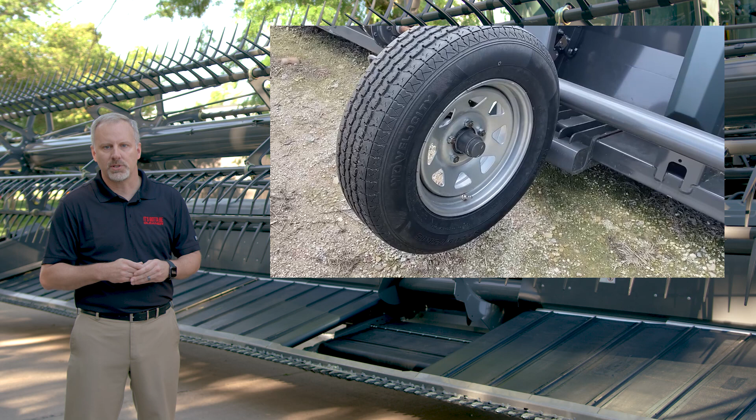We've already talked about some of the options available, but there are a few more we should cover. First, you have the option to add optional stabilizer wheels for the 35 and 40-foot models. Stabilizer wheels will dramatically improve the header height performance in both rigid and flex mode.

The stabilizer wheels are a torsion axle design with no springs or shocks to wear out. They're adjustable with two field positions, an upper position when cutting high and a lower position when cutting low to the ground. In addition to the field positions, there are two transport positions, one for transporting with the tires installed, and the second one with the arm folded up close to the back of the header and the tire removed to reduce transport and storage width.

Another option is the transport kit. The foldable design connects directly to the bottom of the frame. It folds out of the way when harvesting and then folds down quickly into the transport and storage position. We recently replaced the tires with high flotation tires and have made several durability improvements to the frame.

Available this year is an optional top auger, which will improve feeding in canola or any high volume crop such as oats or barley. For harvesting canola, you can choose between 2 end dividers. We have a wing style divider, or you can choose electrically powered side knives. We also have an optional sealing package to seal around the center deck to prevent crop loss under the drapers.

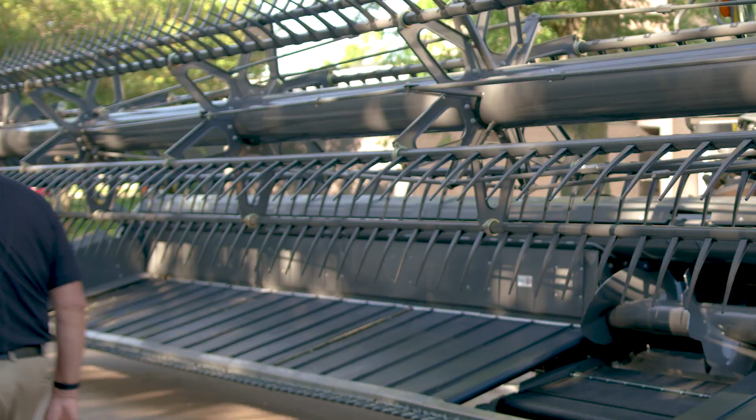Now we're going to take some time and review the 3300 series corn head. The corn head is available in 30-inch spacings and 8 and 12-row configurations for your Gleaner combine. Just like the draper head, the corn head has a single-point multi-coupler hookup for the hydraulic and electrical connections.

The auger is 20 inches in diameter, and the 30-inch pitch of the flighting helps convey that material to the combine. The conveyor hood is standard equipment and helps control crop flow into the feeder house as well.

In order to get the crop to the row units, the snouts on the 3300 corn head have a low-profile design with an adjustable entry angle to help pick up down and tangled corn. The head has hydraulically controlled fore and aft pitch adjustment of 12 degrees, and that gives you the optimal angle needed for picking up the crop. The pitch is adjustable from the cab and includes an accumulator to help absorb shock loads.

The snouts themselves are polyethylene and cove-shaped to promote crop flow into the row units and also helps keep the cobs controlled in that down and tangled corn. The back of the snout is designed to help prevent cob loss, and there are optional ear deflectors available. The snouts have optional skids at the point, which also helps keep those snouts from digging into the ground.

Now David's going to walk us through the row units themselves. The heart and soul of the corn header is the row units.

The row units on the corn header are driven with a self-contained gearbox. The snapping rolls are designed with replaceable knives in a point-to-point configuration. This design aggressively pulls the stalk through the deck plate to strip the ears from the stalk. As an added benefit, the point-to-point design crimps and conditions the stalk to aid in breaking down the residue left in the field. The beveled shape of the deck plate is designed to match the shape of the bottom of the ear, to reduce butt shelling when the ear impacts the deck plate.

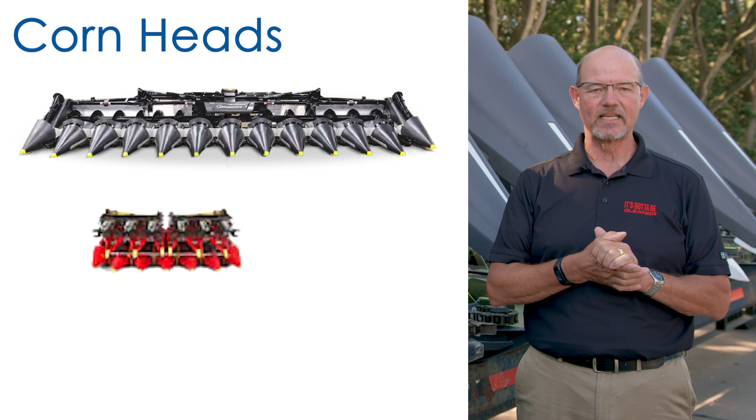The corn head is available in 6, 8, and 12 row, available as well in rigid or folding corn head. All of the corn heads are 30-inch configurations and will also offer narrower spacing configurations. The row units include a stalk chopper as well as an optional reel if needed.

Together, AGCO and Geringhoff offer the largest header offerings in the industry, allowing our customers more choices with greater flexibility for their operations. Thanks for joining us today and learning more about our header offerings for your Gleaner combine. Back to you, Kevin.

Great, guys. Good reminder for everyone on some of the great features of our headers. And also, it's pretty impressive to see how the Dynaflex outperforms the competition.